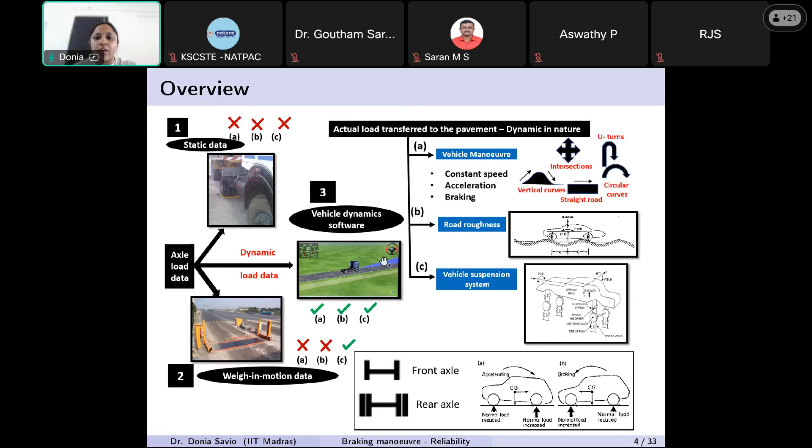Now let me tell you about the variability between static and dynamic loads. When the vehicle is static, we have a constant, non-fluctuating load over time. However, when the vehicle is moving, it will be in a fluctuation mode. I'm not saying it will always be greater than the static load, but at times it will be greater than the static load. This variation is due to inertial force, as I discussed before.

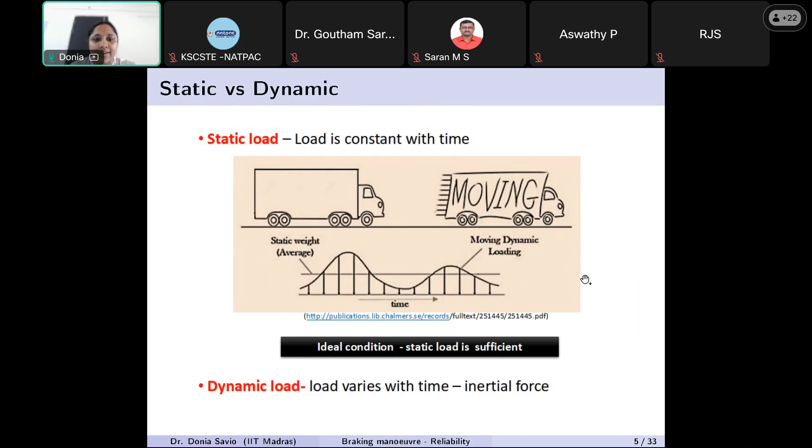Now, how to perform real-time dynamic load data collection? As I mentioned, we should use some kind of software to simulate these loads, and we can look at some works carried out in this area. Especially for acceleration and braking, very few studies have been carried out, mostly from a vehicle dynamics perspective. I saw one work by Nunney in 2006. For road roughness, we have several studies. This is the background of the work from where I started.

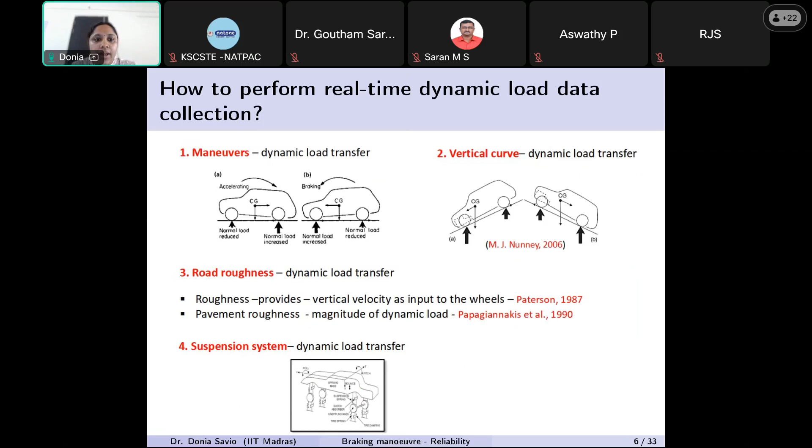Then coming to the reliability part: if we get the loads transferred from the tire to the pavement, how do we estimate the reliability of such loads? That is another concern. In pavement design, for estimating the allowable number of load repetitions, we have a mechanistic part and an empirical part.

So we can actually estimate the critical strains in the mechanistic part. We can use them in the distress transfer functions in the empirical part, and then we can calculate the allowable number of load repetitions. And what reliability is: probability of the allowable number of load repetitions being greater than the actual number of load repetitions.

So in the reliability part, what we need to consider is when there is variability in the loads that are transferred from the tire to the pavement, how to account for it, or how the reliability value changes. So that's what we need to see.

That is what I have done as part of my research work. We have some studies that consider the variability in material properties, like layer thickness and layer modulus variation, and how that influences reliability. But how the variability in the loads transferred from the tire to the pavement varies, and how to estimate the reliability from that, we were not having much solutions to this problem. So this is what I took as my research problem for my PhD work, and I am showing you that work here.

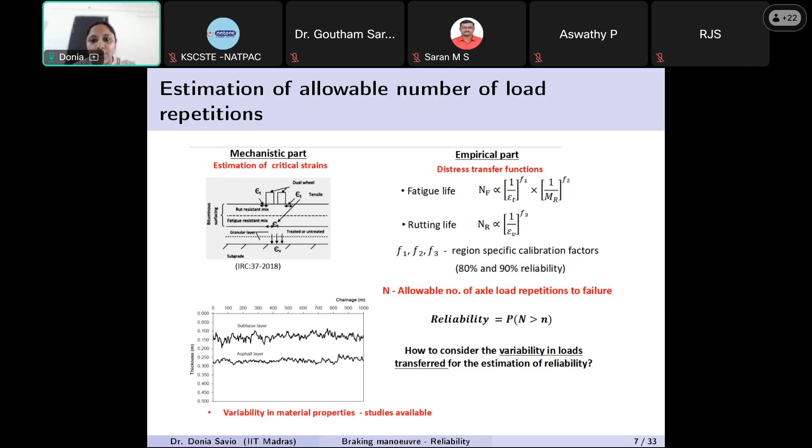Now coming to the braking maneuver. Before coming to the braking simulation and all, I am just taking this as an opportunity to tell you what happens during braking.

What happens during braking is, once the vehicle is freely moving, meaning it is not under acceleration or braking, the longitudinal velocity will be equal to the angular velocity. In that case, the parameter wheel slip, whose expression is shown here, will be equal to 0 — V minus r omega is 0 because both are equal.

Now there is a mu-lambda curve. Mu is the coefficient of friction versus lambda, which is the wheel slip. This is an important curve in the vehicle dynamics part. What the mu-lambda curve shows is how wheel slipping happens and how it leads to the wheel locking condition.

In the free rolling condition, where there is no braking or acceleration, the wheel slip is 0. However, when the coefficient of friction increases — that is, when the braking force increases — the slip value also increases as r omega becomes lesser than v, and then the curve goes like this.

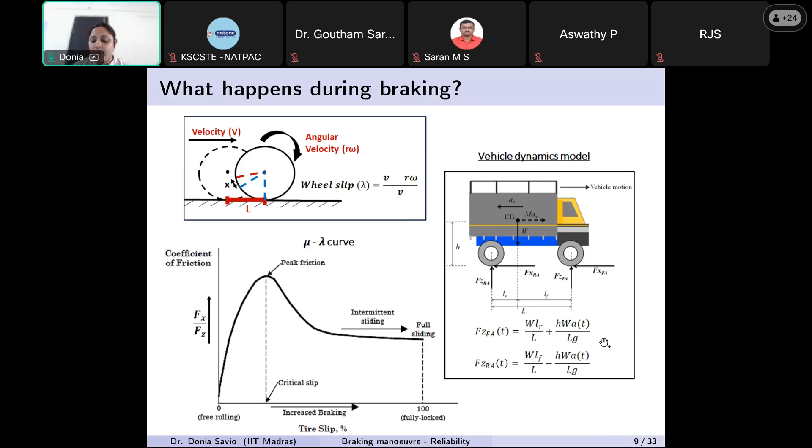Now coming to the braking simulation. One of the unique features of my study was to use a hardware-in-loop setup to simulate the braking condition. For this, I used a vehicle dynamics software known as TruckMaker.

You can see in this setup, TruckMaker is installed in the system and integrated with this hardware-in-loop setup. This hardware-in-loop setup has real brake chambers of the front and rear axle, and there is a driver module where we can apply the brakes, acceleration, and such things. So I used this setup to simulate braking for my study.

And the TruckMaker software mainly has three modules: there is a pavement module, there is a driver module, and there is also a vehicle module.

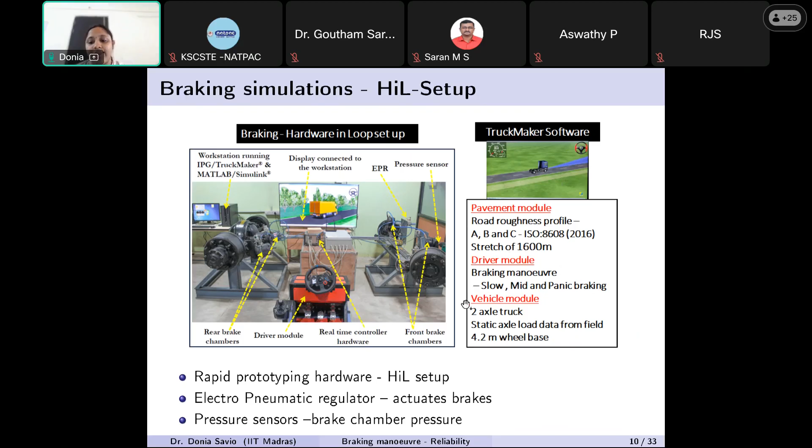Now coming to the test matrix that I have formulated for my research: I took three loading conditions from an axle load survey. They are static loads of 2-axle trucks, and I fitted them with probability density functions, and I took representative unladen, laden, and overloaded vehicles from them. These are the gross vehicle weights of each of the trucks.

And you can see the legal load limit I took as per the old conventional legal load limit. And these are the trucks I used: the same truck, a 2-axle truck with a single axle single wheel in front and a single axle dual wheel in the rear, but the loading condition alone I varied. The wheelbase of that truck is 4.2 meters.

For the braking condition, the speeds I applied were 30 kilometer per hour, 50 kilometer per hour, and 80 kilometer per hour. To make it clear, my driver maneuver was: I accelerated the truck to a constant desired speed, each of these speeds, and then once upon reaching 1000 meters, I applied brakes.

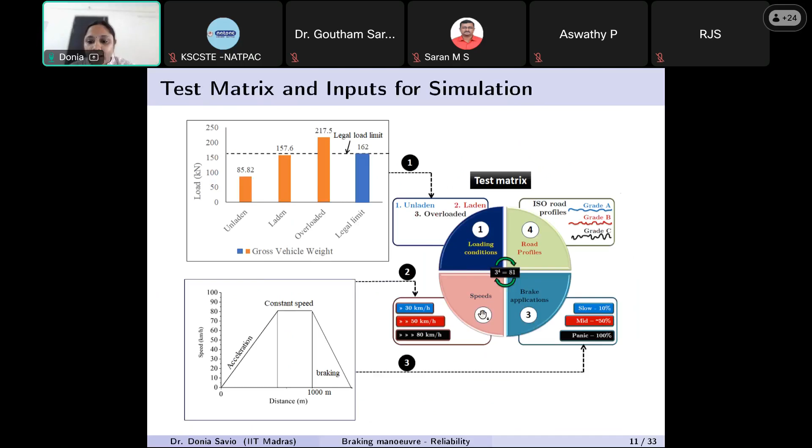Similarly, the gross vehicle weights I input into the vehicle module, and these brakes and speeds I input into the driver module. So these were the input parameters that I have considered for my study.

So even both wheels of the unladen truck locked. Why is it locking for an unladen truck? However, for overloaded and laden trucks, it is not locking. So that is one question here.

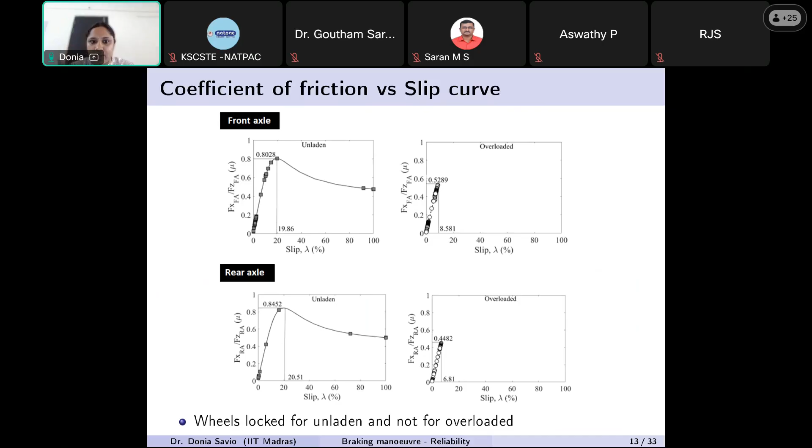In the case of wheel locking, that we can see as I can show you here.

Now, in the case of wheel locking, front or rear, which wheel locks first? That is one insight I got from this analysis. So which wheel locks first? The rear wheels lock first compared to front wheels.

Why is it so that the rear wheel locks before the front? Maybe it is because the vertical load from the rear axle is transferred to the front axle, so the rear axle FZ gets smaller and smaller compared to the front axle. So the rear wheel locks first compared to the front wheel.

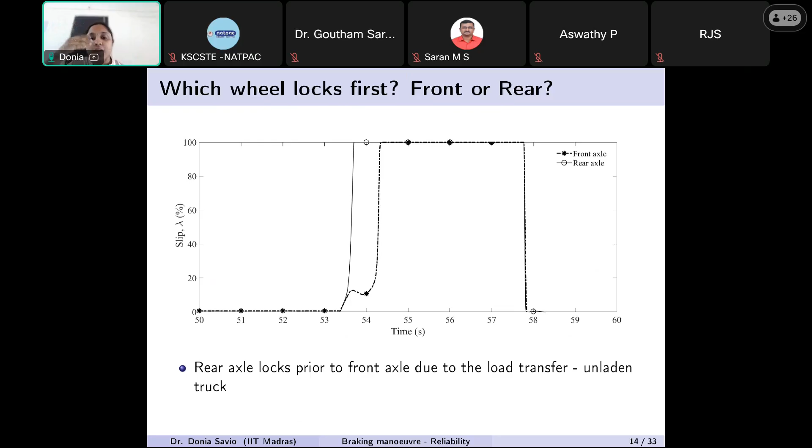Now, the deceleration plot in the case of an unladen truck where wheel locking happens is shown here. You can see that at 1000 meters, the brakes are applied, and you can see the deceleration values here. At some point it increases again, meaning the deceleration value decreased, and then it reaches a stationary condition.

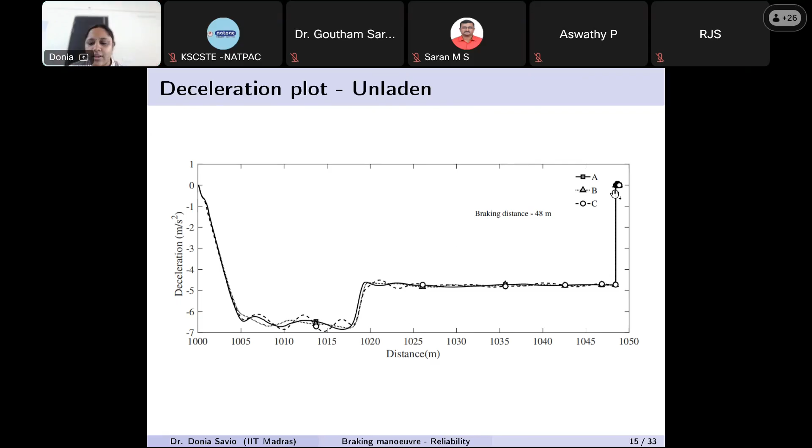However, in the case of an overloaded truck, since wheel locking is not happening, you can see how the deceleration plot looks. So no such bumping effect, or that decrease in deceleration value, can be seen.

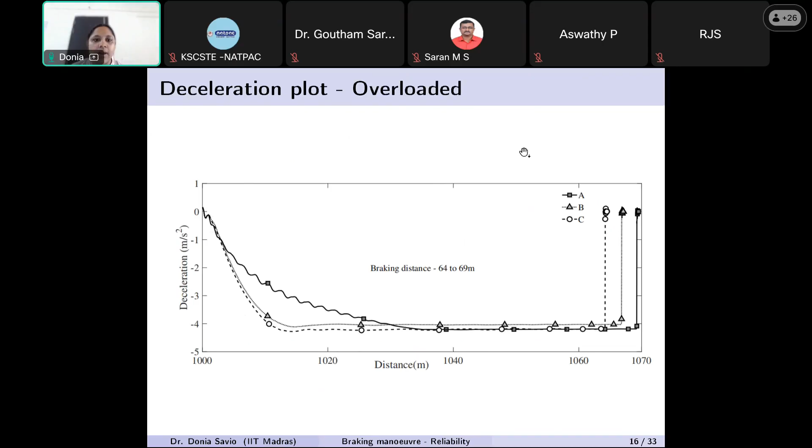Now coming to the loads that are transferred from the tire to the pavement during the panic braking maneuver, this is in the case of an overloaded truck traveling at 80 km/h where panic braking was applied. This is the load transferred from the front axle, and this is the rear axle. You can see there is a load transfer from the rear axle to the front axle.

You can see that from static loads, it is reduced in the rear axle, which is gained in the front axle. From static load, it has increased. These are for different profiles I have plotted. For profile C, compared to the static load, it has increased 1.8 times, then 1.7 times for profile B, and 1.5 times for profile A.

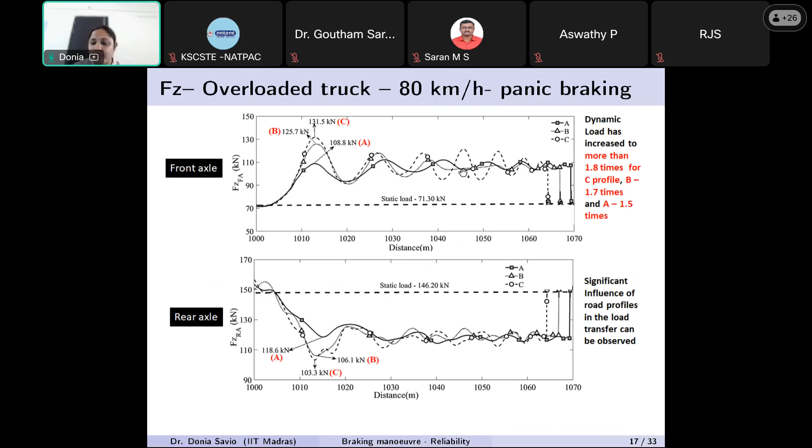So you can see how much the loads are transferred. The significance of the load transfer from tire to pavement during braking can be seen here. Now, as a comparison, I'm showing for each truck the maximum loads transferred from the tire to the pavement, both horizontal and vertical loads.

This is for an unladen truck. The static load is for the front axle, because the load is transferred from the rear axle to the front axle, so I am considering the front axle here. The static load is 46.30 kilonewton, and the respective dynamic load is found to be this. Here you can see for a laden truck how much it is, and for an overloaded truck also how much it is.

And again, the longitudinal loads transferred from the tire to the pavement during braking, the maximum loads were found to be nearly similar for all the trucks, that is 24 kilonewton.

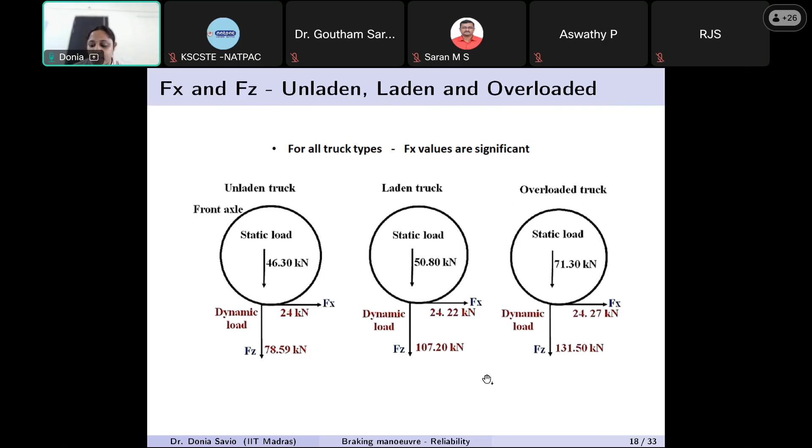So this is the inference I got from the braking maneuver. I could get the horizontal and longitudinal load transfer from the tire to the pavement, especially during the panic braking maneuver. I was also able to study the mu-lambda curves, the wheel slipping, how the wheels got locked, and such things. In the case of panic braking, it was identified that the laden and overloaded trucks are safe during panic braking, at least regarding wheel locking condition.

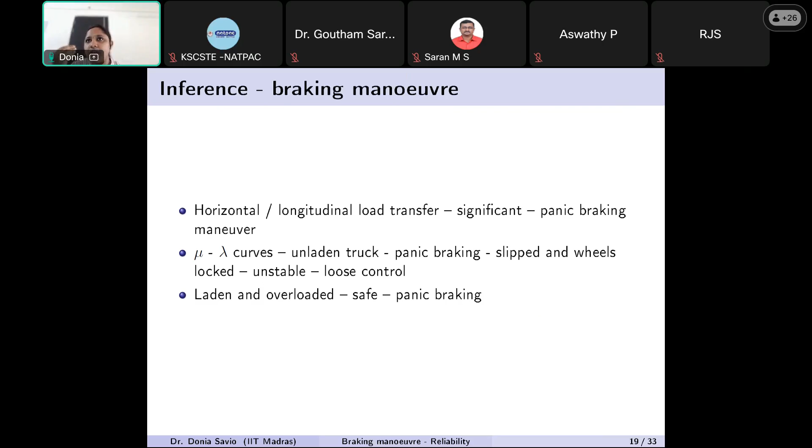Now we got the loads. Then how can we consider this variability in the loads in the estimation of reliability? So we are going there now. For the estimation of reliability, I have formulated one procedure.

As you know, there is variability in the material property along the pavement, and also variability in the loads transferred from the tire to the pavement. So in this, I have considered the variability in the material property as well as the variability in the loads transferred from tire to pavement during the braking maneuver. This is a typical pavement cross section, which I took from the IRC 37.

The lower and upper limits of the material parameters I took from IRC 37, and I assumed mean and coefficient of variation values for these material properties from one of the research papers. Using Monte Carlo simulations, I generated random numbers for each of the material properties, assuming a normal distribution, and generated all these variabilities, then used RSM models.

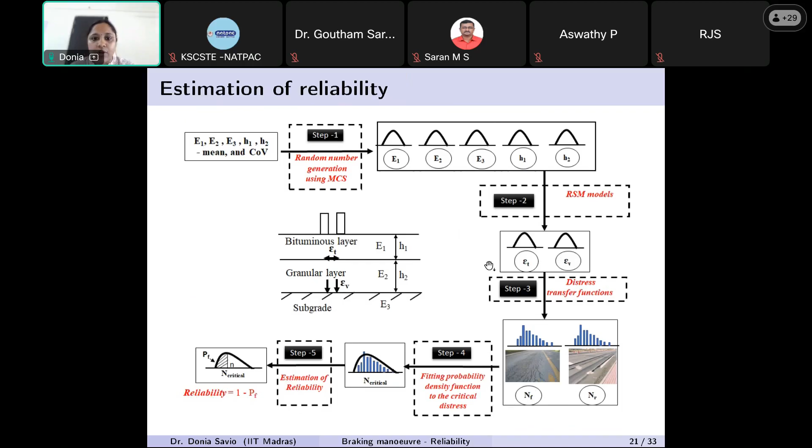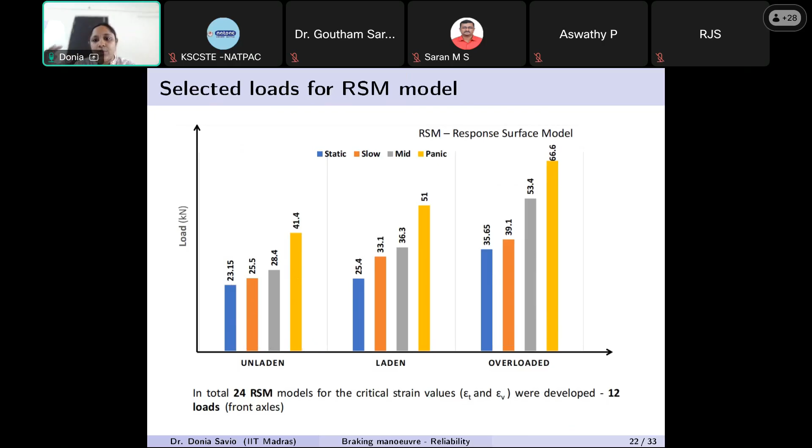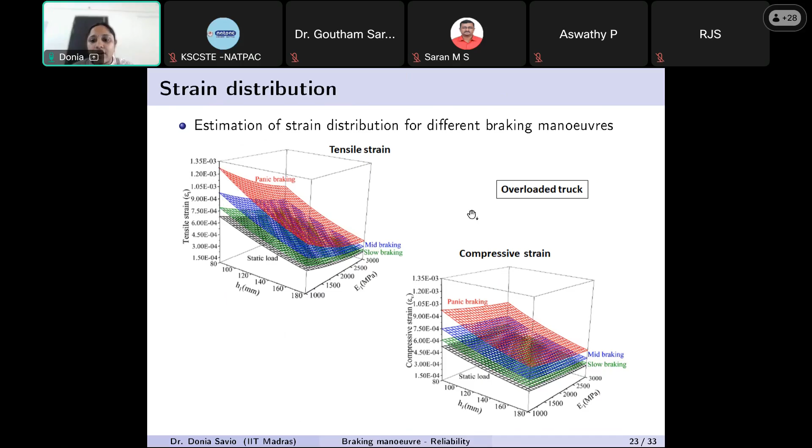Now this is the distribution of NF using the distribution of strains. You can see this is for a laden truck under static load—this is how the number of load repetitions to failure varies. With slow moving braking and panic braking, you can see how the NF value varies.

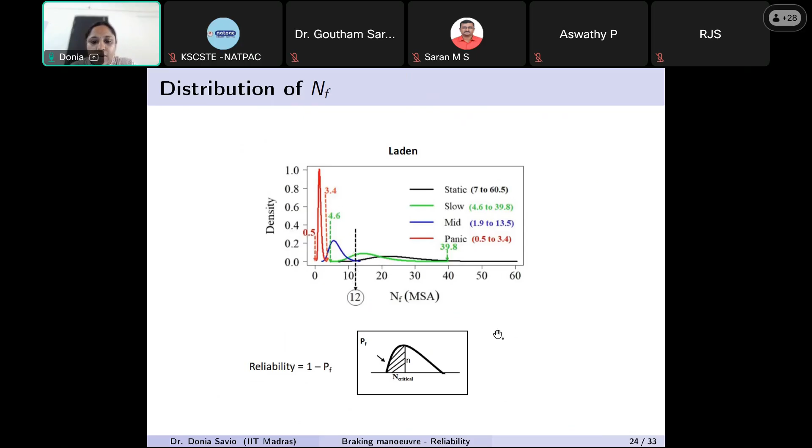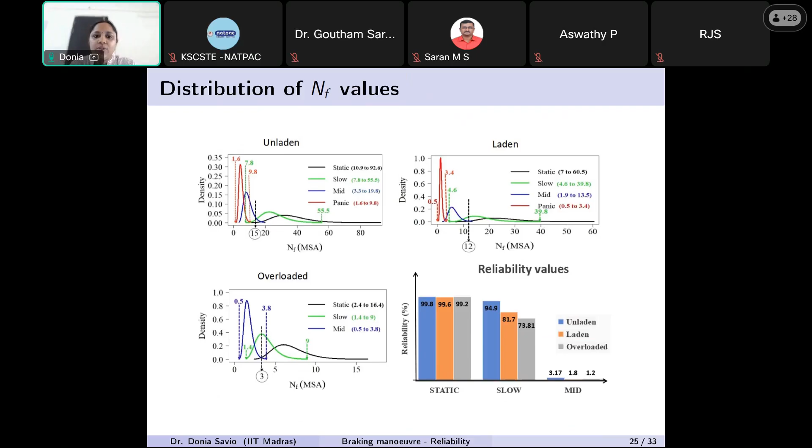Now there is a problem here. You will be thinking I am saying the loads will always be subjected to either slow braking, mid braking, or static. But we don't have data on the percentage of braking—how much vehicles are braking. As of now, I did not get any data related to that.

So in that case, what I did was a sensitivity analysis. I considered 40%, 60%, and so on, varying the proportions—just showing how the sensitivity analysis was carried out. So 40% I considered static trucks, and the rest 60% slow braking trucks. In that case, how the reliability value changes—that's how I computed it.

In a nutshell, I can show it for a laden truck how it varies. If we consider only static load for computing the reliability, then I can get it as 99.85%. But when I consider the static load combined with slow braking in a 60-40 combination, then the reliability value reduces to 92.6%.

And then if it is a mid and a static load combination, then it again reduces to 58.48%. So from the study, this is what I am giving as a message. This is how the reliability value will change if there is variability in the load that is transferred from the tire to the pavement, if we consider the load variation.

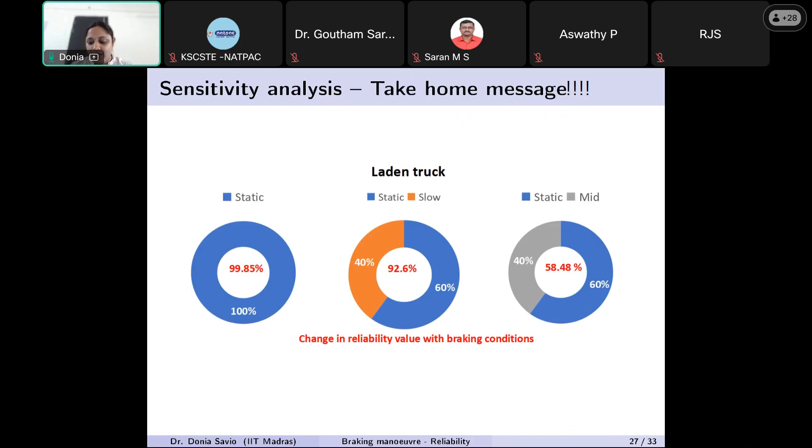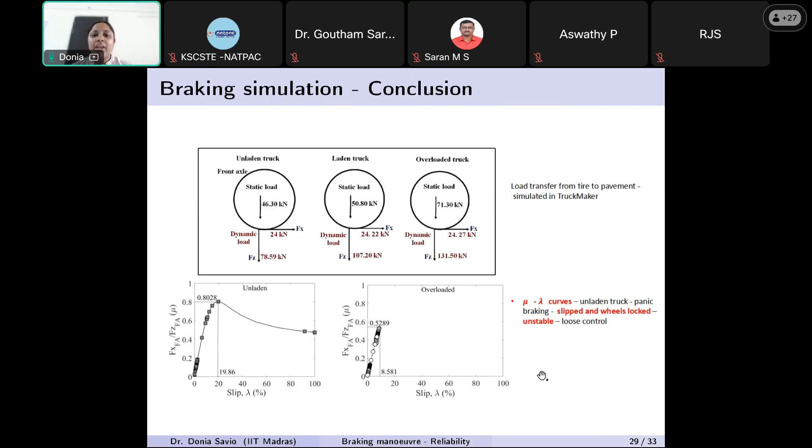And again, this is a preliminary study. There are a lot of scopes for the study. We need to explore this area a lot. So this is what I showed you before. This is how the reliability value changes for different combinations of braking.

And now, the novelty of the study is that I was able to do it for a 2-axle truck, just a 2-axle truck in a straight road section. You can use it for other road stretches, like vertical curves or horizontal curves or U-turns at intersections and such things, and see how the load is varying.

This is the comment I got while publishing this paper. The reviewer mentioned that it can be used as a model for other projects to estimate the loads transferred for other configurations of trucks. And again, the reliability framework that I have formulated can be used for other truck configurations, other loading conditions, or other road profiles and road variations, and then we can estimate the reliability.

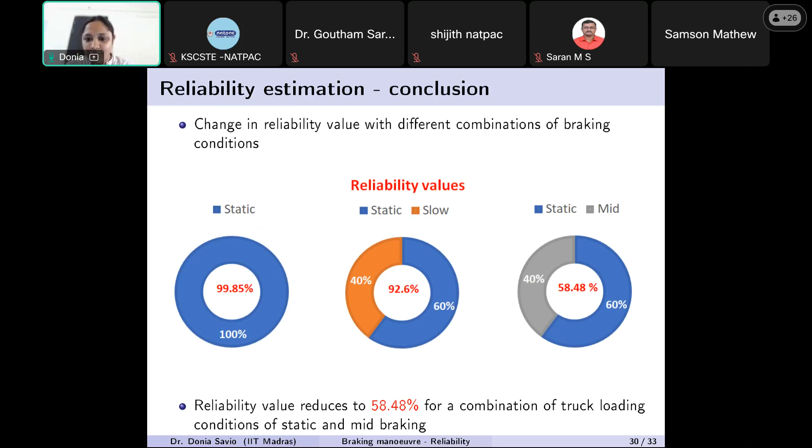Okay, then this combination, static, slow, mid, and panic conditions and all, how do you derive those situations? Sir, actually this is like a sensitivity analysis I did, because everyone knows that not all vehicles will be braking in the same way. So I just wanted to show that if this is the case, this is how the reliability value will change. So this is how I formulated it, sir.

So if I consider like 100 trucks, 40 trucks in the simulation, I reran the Monte Carlo simulations to get a 60% static load condition, then a 40% slow braking condition, then I clubbed them together, and luckily I got it again as a normal distribution. Otherwise this case would have required some other reliability procedure. But for a few cases like this, I was able to estimate the reliability and generate the value.

Okay, very good. Last slide - what can be the scope of continuation of this novelty? Yes, sir, this is something great - probably a dozen PhDs we can produce from this.

That is what I was telling, sir. I just created the road profile for a straight section. We can always create a road profile for a vertical curve, horizontal curve, and such things, again with different combinations of vehicle types, and if it's a test track, driver behavior can be included. Again, estimation of reliability - some constraints will come as we consider all these things. So that is another work. Different works we can do from this.